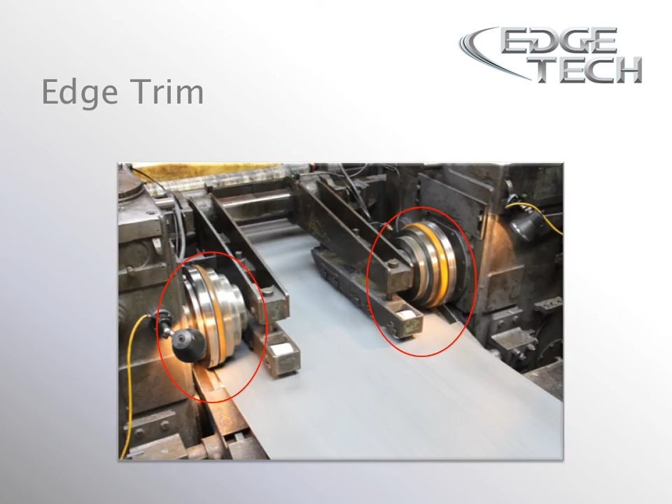Sawtooth, knife cracks, and burrs are just a few of the many issues that operators have seen on the trimming lines that create problems later on during further processing of the coil in cold reduction, galvanizing, and other finishing lines.

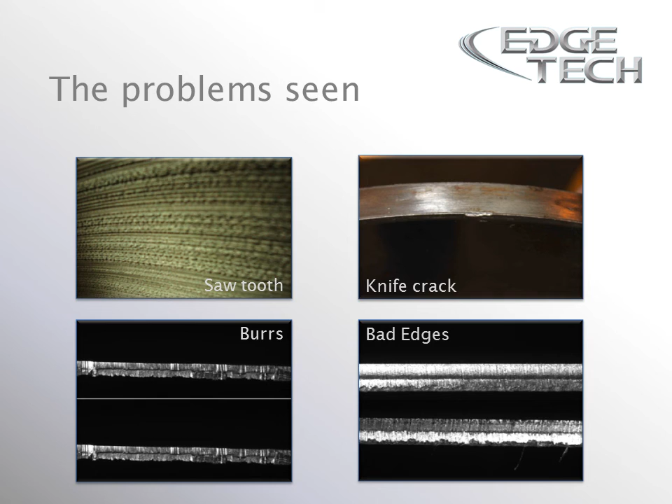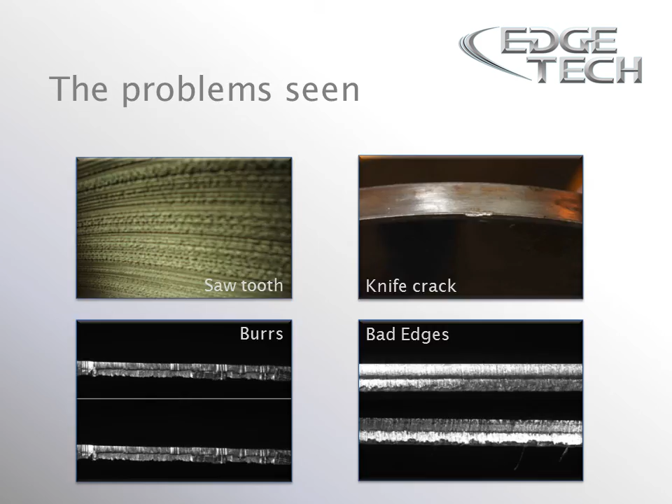The result of this has been producing coils that need to be retrimmed in a secondary operation. It costs mills as much as $1 million a year for this retrimming procedure. The real problem is not that these issues occur, but not knowing about them until it is too late.

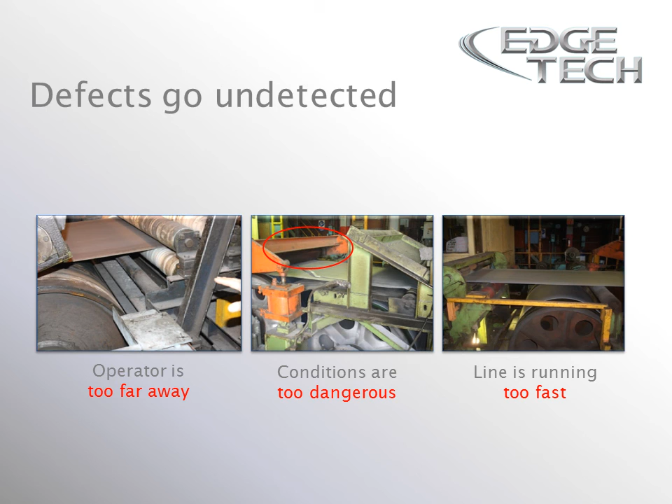Operators are running blind. Coil trim defects used to go undetected for several reasons. The operator is too far away from the strip to see detail. Even if they could get close to the strip, it is far too dangerous to stay there. A third reason is that the line is running so fast that even up close, they could not see the detail needed to evaluate the quality of the edge.

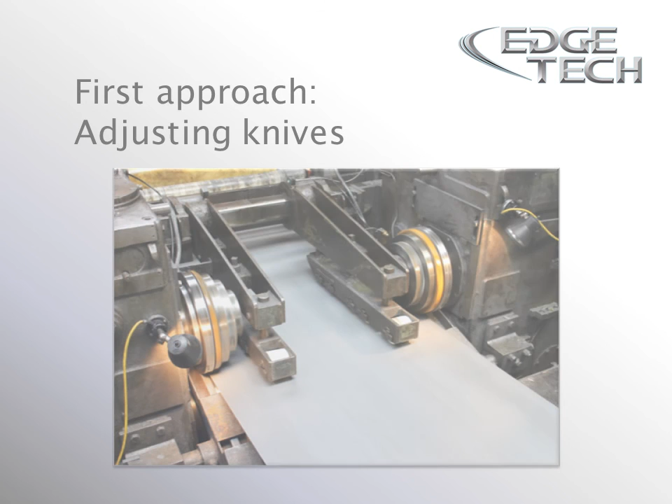Operators have to wait until the coil is done before looking at the edge of the coil. Then they have to guess at what may solve the problem. When a problem with the coil is detected, their first approach is to try to adjust the knives. But which adjustment do they do first? From trial and error over the years, they have an idea of what may work, so they change settings and wait for the end of the coil to see if they guessed correctly.

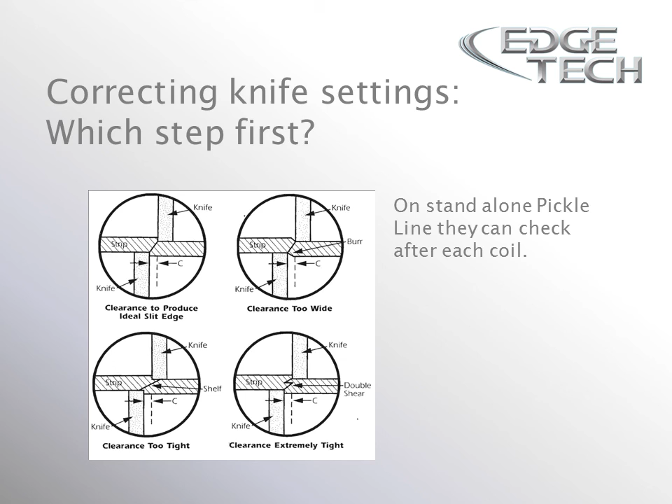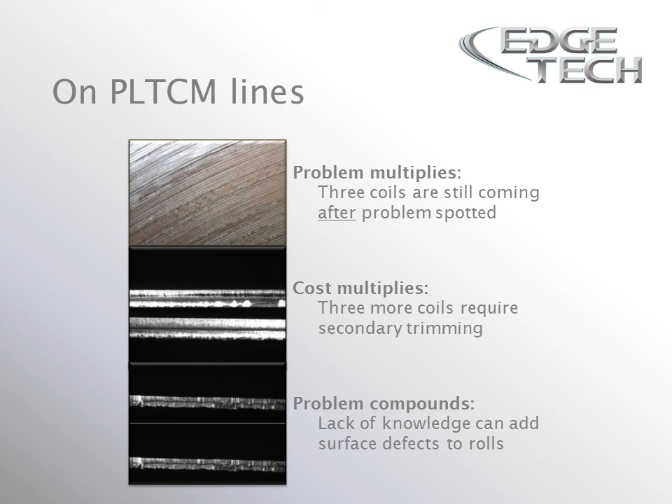On a standalone pickle line, they can check themselves after each coil. On a PLTCM line, the problems multiply. Not only do you have to wait 3 coils to see the results, but the strip has been reduced, making it even harder to determine the problem. In addition, the operator does not know if burrs or other defects will add surface defects and scar the rolls in further processing. The solution is EdgeTech.

Unilux and the EdgeTech system has eliminated these problems, and for the first time, operators know the quality of the trimmed edge immediately after the knife cut is done, in real time.

With EdgeTech, operators no longer have to run blind. Now they can see the trimmed edge immediately after the knives and know the quality of the trimmed surface. Should they need to make adjustments, they see the results in high definition and can take further action if needed.

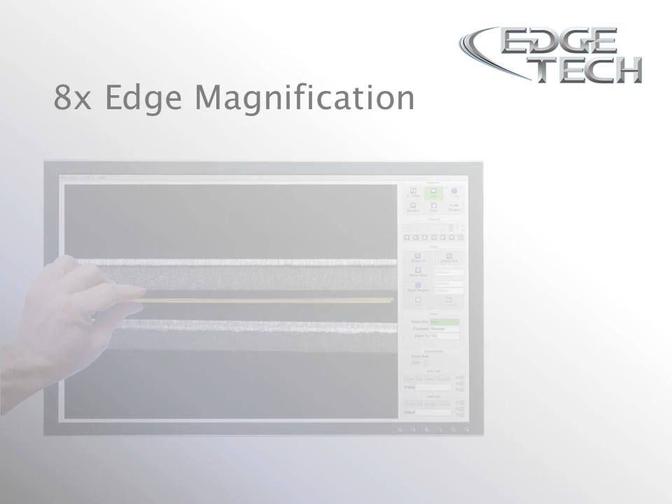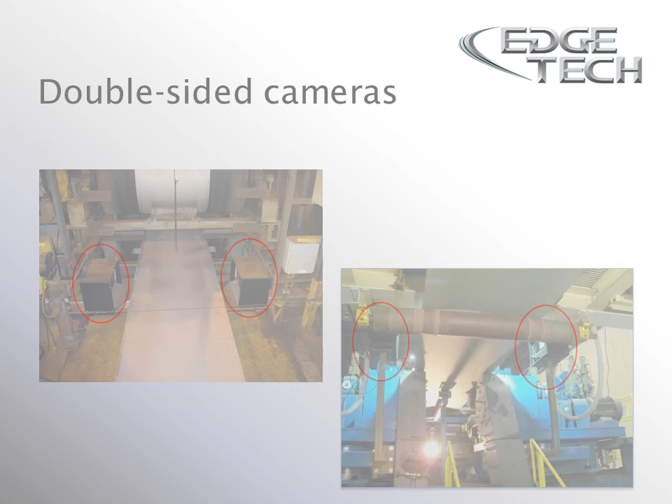With 8 times magnification, the operators can see the quality of the trim at a glance, and even the smallest of imperfections are easily seen. By locating a camera on each side of the strip, EdgeTech allows the operator to see what is happening to the entire strip edge on both sides at the same time.

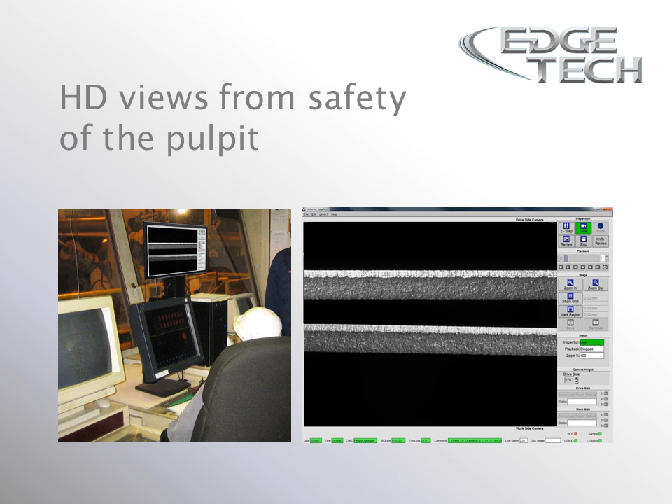With EdgeTech, they can use this technology to identify coil edge issues in real time from the safety of the pulpit and without having to run down to the line to see the coil. The purpose of the system is to maximize the value of every coil you roll by giving you the clearest and most complete images possible so the operator knows their edge quality at all times.

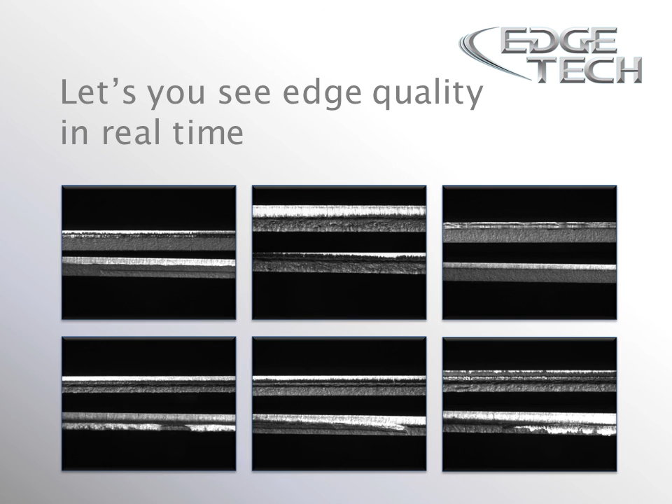It delivers those images in real time so they can assess the quality of each coil. They have immediate knowledge of the changes that are needed, and just as importantly, if those changes have corrected the problem or if further action is needed.

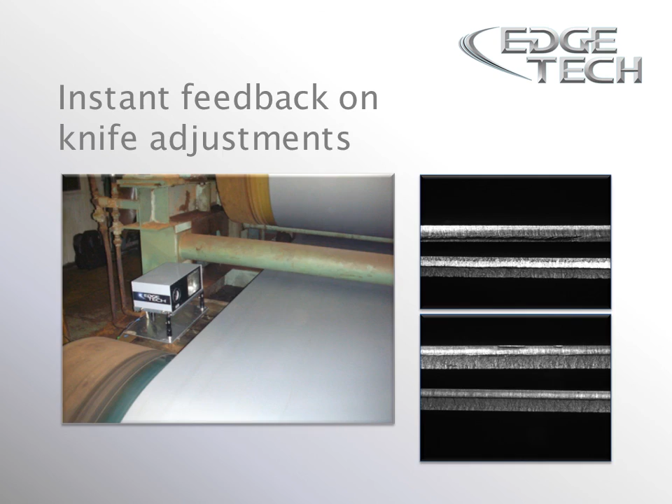They now know if their knives are trimming properly or if action has to be taken. They can also see the condition of the knives, if they are wearing properly or if they should be changed earlier than planned. Sometimes a simple change in the knife's lap or gap setting can extend the knife usage longer, or at least correct the cut from a worn set of knives to finish a coil and still maintain a good edge.

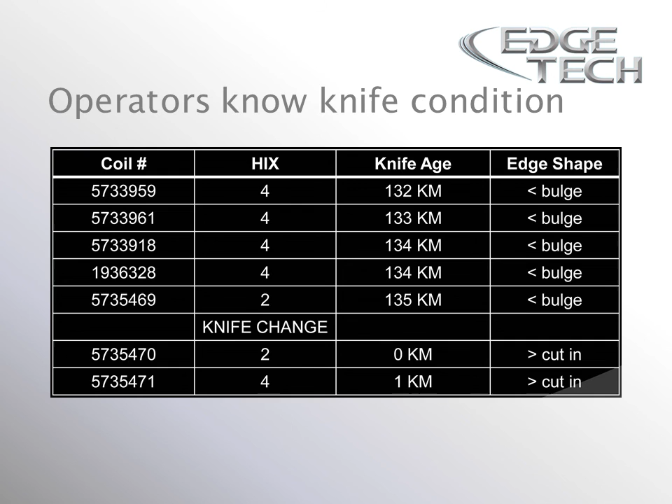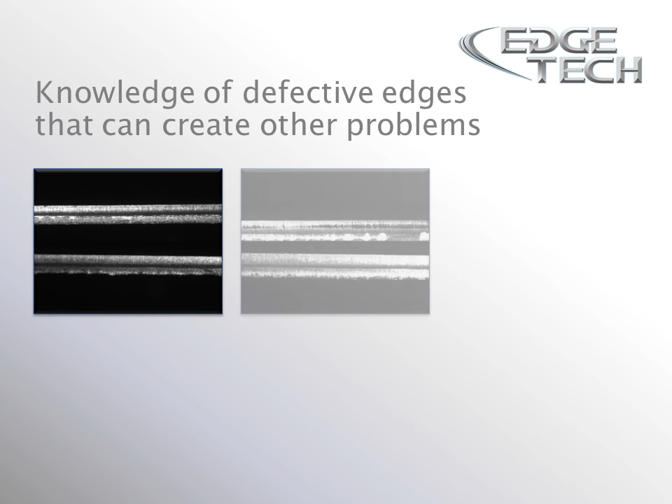The system also alerts the operator to other edge defects that can cause problems in further processing. Bad edges like these can scratch or mar the work rolls. Now, when wider strips are rolled, these scratches are transferred into surface defects that could be rejected by the customer.

These coils would need to be slit to a narrower strip, eliminating the surface defect, and a new coil has to be scheduled to be re-rolled to fill that order, which could mean a late delivery.

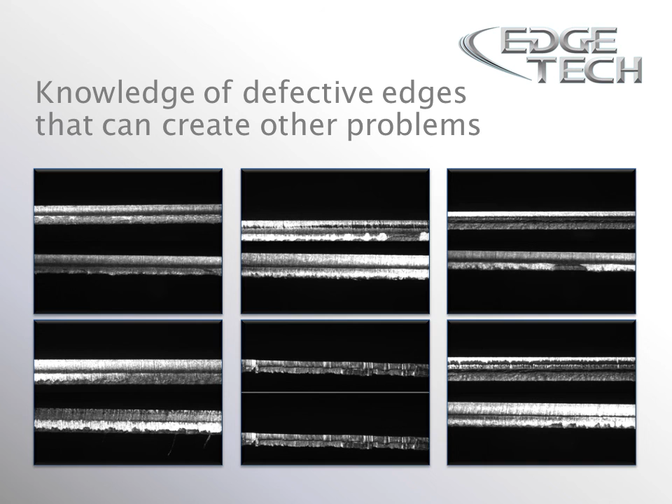With EdgeTech, corrective action can be taken to eliminate these defects. If they can't be eliminated, the rolls can be inspected before wider coils are run to determine if roll changes are needed. Should there be a problem such as a knife crack or pickup, it can be seen and action can be taken to eliminate further coils from being affected.

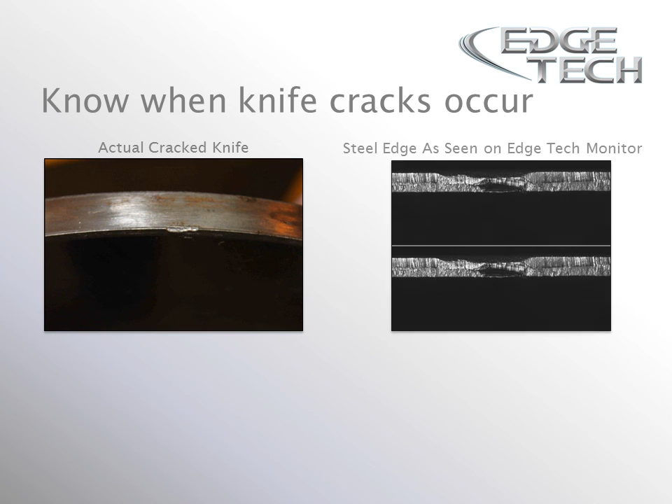With 100% knife circumference capture, the operator can check at any time the true condition of their knives.